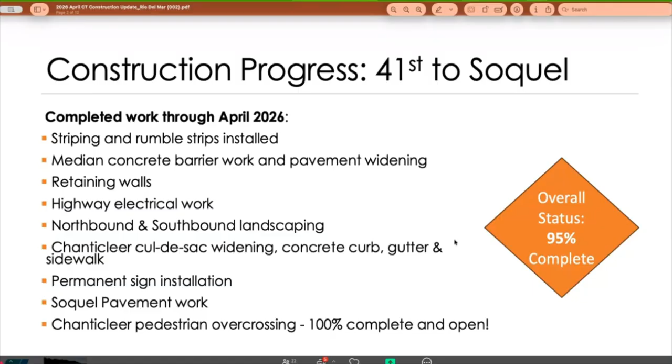They had to put an additional guardrail in there to protect one of the columns of the new Chanticleer pedestrian bridge. So that is the remaining work and punch list work. This one is almost ready to be closed very soon. We can go into the next one.

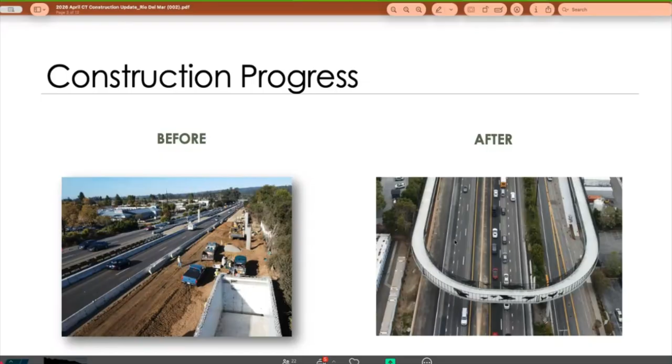So this is just showing how it used to be before, right before the Chanticleer bridge was built. You can see right now the difference. This is also an overview of the change.

It's demonstrating the red colors, where the bus-on-shoulder facilities will be used, which is the highlight of this project, something that has never been used anywhere else. This is a pilot program being implemented in the county. RTC was very active in pursuing and following this type of system that we're going to be implementing and seeing how it works, and then eventually, if it makes sense, expanding it for all the communities in the future.

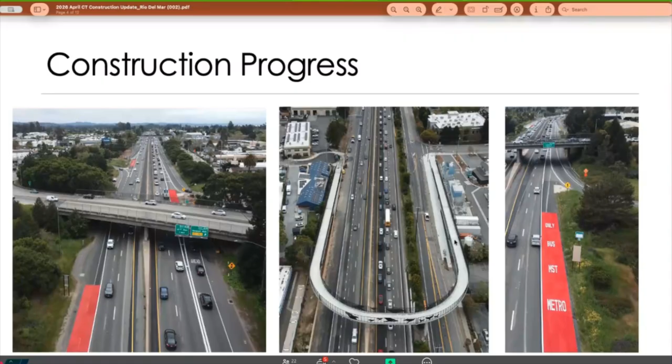Remaining construction is just final punch list and change order work, so it's almost there. They're showing summer 2026, so you won't see much work. I think a lot of the barrier and temporary striping at the Soquel on-ramp will be removed this week, so you'll gain that auxiliary lane back again.

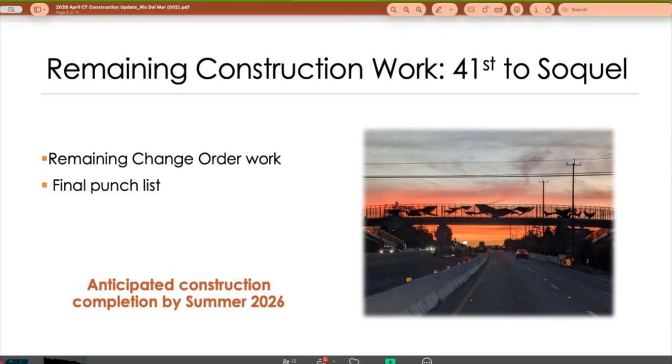Gonna sneak out on you. Yeah, thank you, thank you Rebecca. Bye, bye, see you at the next one.

Okay, now we're moving into this phase 2 project, which is mine. This is from Bay Avenue, Porter Street to State Park. Progress today includes completion of the foundations and falsework for the Mar Vista pedestrian overcrossing. You can see the bridge already starting to rise, right? It's pretty visual right now.

New Capitola Bridge overcrossing is 100% completed. We opened it to traffic, so it was a big milestone for the project, and all the residents were really happy to gain it back with the additional safety features we included, which added bicycle lanes in both directions and a sidewalk. So that was a big success.

And substantial completion of concrete median barrier - about 80% of all the median work is done. The only remaining portion is around the Mar Vista POC bridge, because we have the falsework right now, and that doesn't allow us to do a lot of that work in the median. So we have to complete the bridge, remove the falsework, and then concentrate on the median.

Completion of retaining walls is pretty much done. There were 2 retaining walls at Bay Avenue and Porter that we were supposed to be building, but that meant closing those ramps for a long duration, impacting residents and businesses in the area. So Mark Thomas helped us out with redesigning and eliminating those retaining walls so that we shortened the duration of the work needed to incorporate the bus-on-shoulder facilities. So we went from 6 months to probably 4 months or even less. That was a big gain for the project, time-wise and also cost-wise with the deletion.

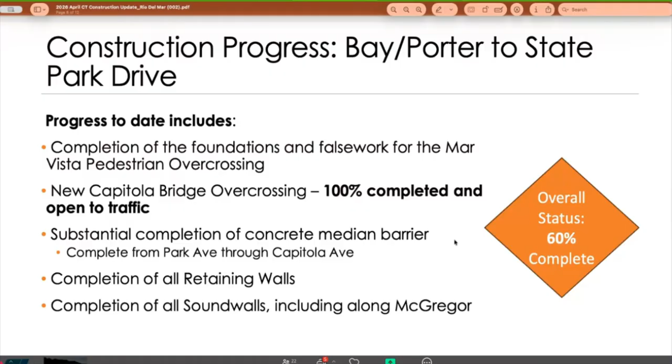This is just showing photos during the construction of the Capitola Bridge, and this is pretty much how it looks now. At this stage we were still working. Once we removed the falsework, we were able to do all the median work, and now we have a solid connection of concrete barriers right now.

That allows us to move traffic toward the median now, so it allows us to do a lot of the widening on the remaining portion of work much sooner. That work was scheduled to start this fall. As we run the construction, we're always trying to see how we can accelerate the schedule and complete the work much sooner, so we're gonna be doing about 80% of what we were supposed to start this fall - we're gonna start it right now. So we'll gain the good weather of summer to complete all that work, and the only remaining portion will be right around the Mar Vista piece.

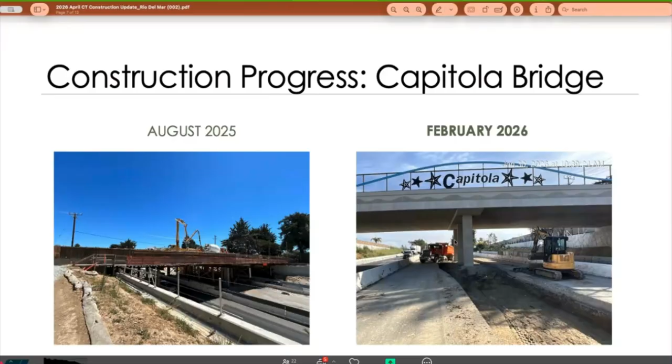Next one, this is just showing the progress of the foundation work, columns, and right now the falsework is up and running. We're starting to do some of the preliminary work, and we had the first frame 3 - frame 3 and 4, so we'll be starting next Monday. It's happening faster, it's really fast.

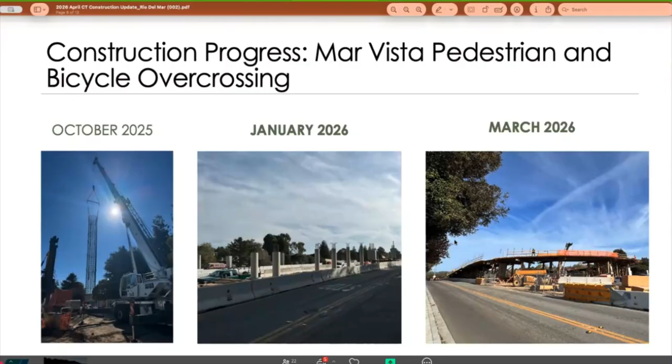No, we don't have any. The problem with that application is that unless you keep reapplying it, it wears out, so then it becomes a problem. During construction we have the availability of doing a lot of stuff, but once it goes into maintenance, they have limited resources, so it becomes a problem for them.

Construction look ahead: major remaining work includes completion of the Mar Vista pedestrian and bicycle overcrossing, widening of the shoulder for the bus-on-shoulder and auxiliary lanes. We're going to gain a lot of ground by advancing the stages, starting right now with all the outside widening for the bus-on-shoulder, including the combination of stages that she mentioned.

Bay/Porter ramp changes will allow us to close those ramps for shorter durations so we can do the work faster and give back to residents and businesses. We always try to stage it so we don't close two ramps at the same time. That's continuous communication with the contractor to minimize impact to the community. It's not just about closing and doing our work - sometimes we spend more money to make sure it benefits the residents. We want to keep residents in mind so they support the project and are happy with the product.

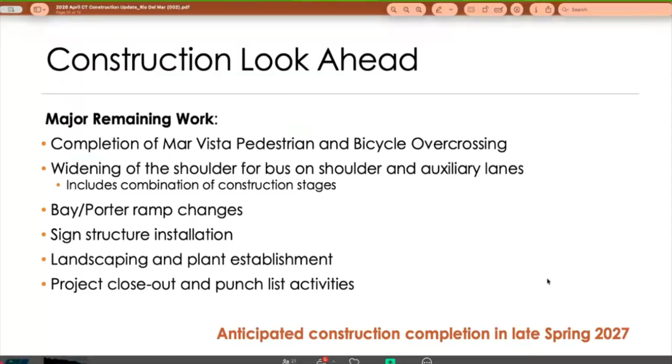Hang on, I had it here. Right there, PG construction. No, go. It's the second one in. That's the one, right? That was the one we just did. We just did that. So do another one? Are we in the right spot? Not in the right spot.

Oh, we have some instructions. Right here, there, that one. There you go. So if you go up to the... where? Beginning? No, sorry, is that what we're shooting for? I'm going right into it. That's wrong. Obviously it's harder than it looks.

We should all sing a quick song, shall we?

Auxiliary lanes, oh, so what's going on here? I got it, here we go. Good, here we go. Stop sharing. Nope, we're good. Where's the... okay, I know, I don't know, nope, it's not stop the sharing. The resolution made everything so tiny here. Where's the?

This, how do you close? There was a red button. Let's just minimize it. There we go, there we go. And then we'll make this... I really, just leave it like this.

I might work with control F. I got this, do it. No, that's what I was commanded. Okay, it is Greg. Well, actually, no, no. Yeah, I can, Greg, there we go. Okay, all right, meet you both. And so now here, and we'll wait. There you go. Okay, all right, we got it.

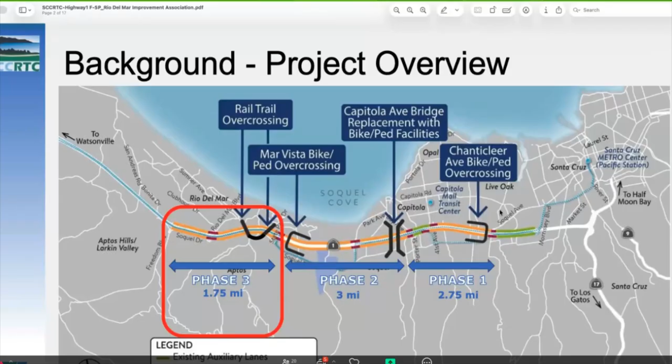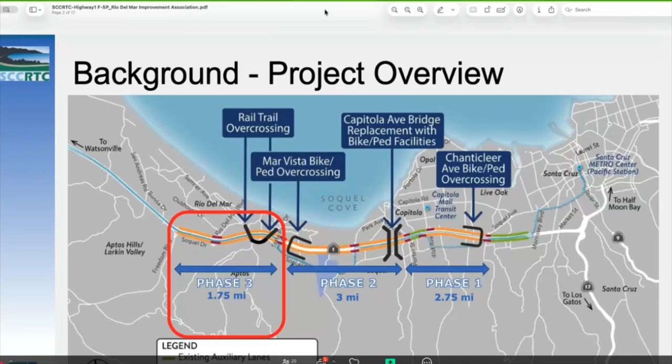If we can go to the next slide - just a quick overview. Phase one, as Fernando was saying, is nearly complete, just wrapping up punch list items. Phase two, the State Park to Bay Porter segment, is 60% complete. And then I'll give an update on phase three, which is about 2 miles from State Park down to Freedom Boulevard. As part of this project, we're also constructing segment 12 of the Coastal Rail Trail.

Next slide. So now, just to confuse everybody, we flipped you around - that other slide was pointing a different direction. So now in this case, north is up, the ocean is down here. Here's State Park Drive, so it's picking up from where the segment 2 project ends, and then it's constructing those auxiliary lanes between the interchanges, like between Soquel and 41st Street, there's a lane that connects the off-ramp to the on-ramp.

And that's again to help with merging on and off the freeway. So it allows for some congestion relief, but the state of California right now is not funding new lanes on the state highway system. So there's a lot to this project.

We're going to be widening the bridge that goes over Spreckels Drive as part of the project. There's some work where we're going to be relocating the roadway for Moosehead Drive, so I've met with a number of folks about the relocation of that road. There's various sound walls that are going to be constructed with this.

And then if we look at segment 12, for anyone curious what that is of this coastal rail trail, it picks up from the end of segment 11, which is right at State Park Drive. It runs along the rail line. There will be a new pedestrian overcrossing over the freeway. It goes down through Aptos Village, crosses over the freeway again, and then comes down and ultimately terminates just on Sumner Avenue, just south of Rio Del Mar. So it's about 1.2 miles of that segment.

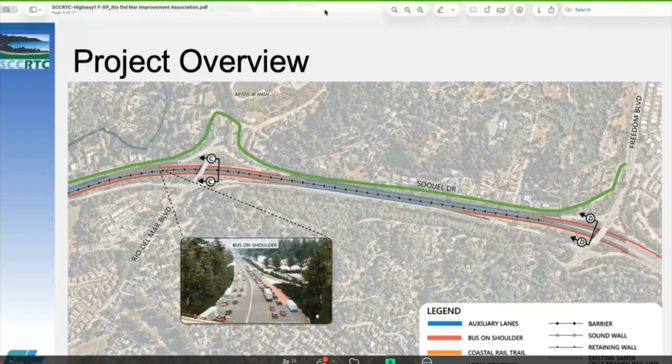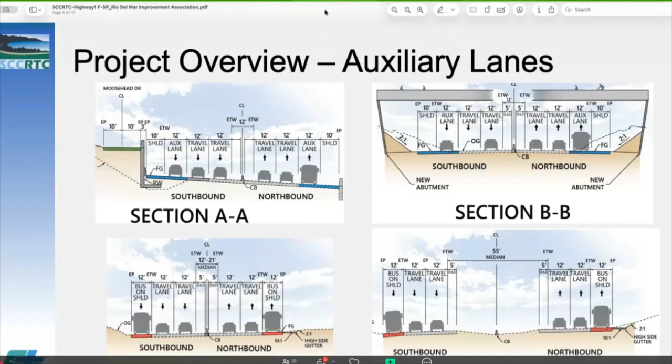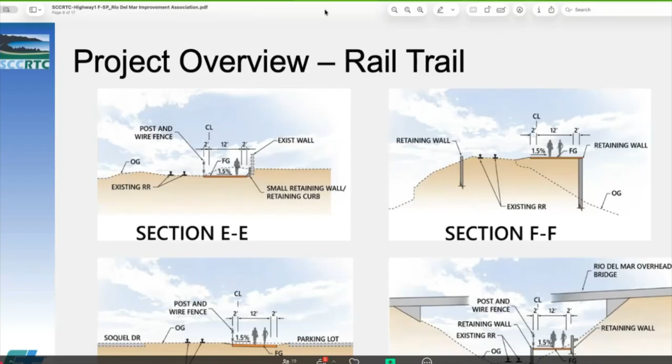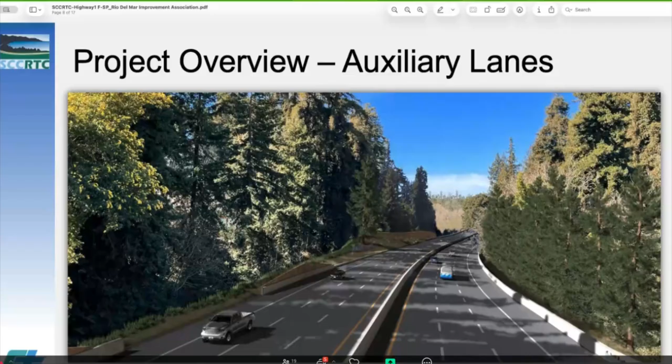Is it turning into an exit-only lane, is what you're saying? Yes, the outside lane now. Exactly. The outside lane will then exit at State Park Drive in that rendering.

Now this is looking northbound from Freedom Boulevard. Again, this is what it looks like today. And here you can see this is where the bus would operate on the shoulder in between the interchanges, and then it'll merge over into the auxiliary lane. Going back, you can see this is the median that's currently out there today. Rather than just putting a new lane on the outside, you can see how we've shifted the whole freeway in to preserve that corridor.

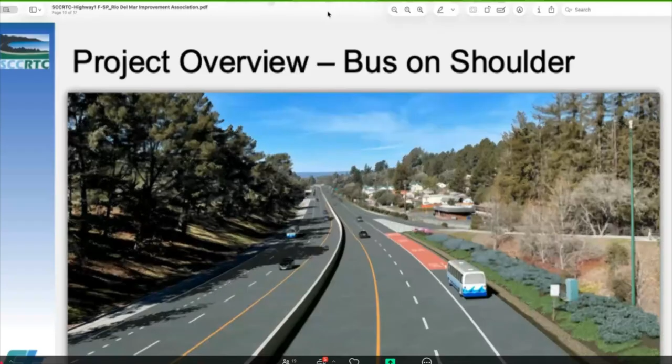This is just a graphical representation of how the bus on shoulder facility works. As Fernando mentioned, this is unique - Santa Cruz County is the only county in the state of California that has legislative approval to do this, so it's being looked at as a test project for the entire state of California. In between the interchanges, the bus would operate in the auxiliary lane, and then continue through the interchange on the shoulder before merging back into the auxiliary lane on the other side of the interchange.

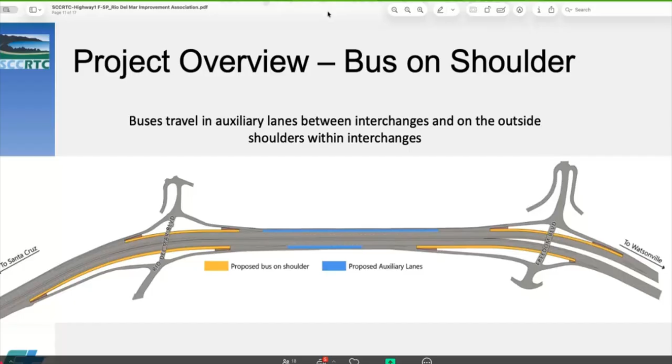So that was the highway improvements.

This now covers segment 12 of the Coastal Rail Trail. There are 5 structures for this 1.12 mile section of trail, with 5 bridges that need to be constructed. It's going to be pretty impressive.

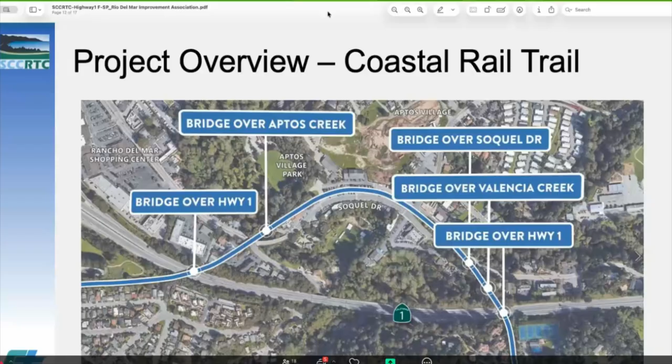If you go to the next slide, this shows some of the art implemented on the bridges that go over the freeway. This was one of the concepts reviewed for this segment of the corridor, and this is a representation of what that art would look like on those bridges.

As we've marched our way through the corridor, every community has had the opportunity to weigh in on the embedded concepts, which were ultimately used in the final design. The Capitola Bridge that we just saw, Capitola residents got to pick. The Chanticleer pedestrian overcrossing with the whales, that community picked. When we did the outreach a couple of years ago, this was the theme community members wanted for these bridges.

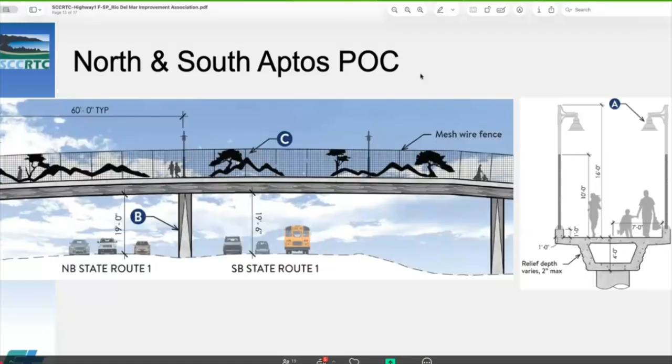Next slide. So this is Soquel Drive right here, and that's Spreckels Drive. There's the rail bridge that crosses over Aptos Creek. Initially we were looking at a bridge with multiple spans.

The problem is there's a high pressure gas line here, and to move it would cost about $8 million. So we started looking at what else we could do instead of spending $8 million to move a gas line, and we came up with a signature structure instead. This is what we're ultimately moving forward with. From this perspective it's hard to see how long it is, but it's 300 feet long - it's going to be a very impressive bridge when constructed.

You're working under the bridge right now - there's a gas line up under that bridge. I think PG&E or somebody's doing maintenance underneath there, not sure what's going on. I drove by and saw that, right here. Yes, we should ask about it. It is PG&E.

Can we have a signature color? So this is the color that was picked - brown, called Golden Gate, using Corten steel. Corten is a rust steel that rusts, like the Golden Gate Bridge. It has a protective coating, and the idea is it helps blend it into the scenery behind it, as opposed to stainless steel or galvanized steel.

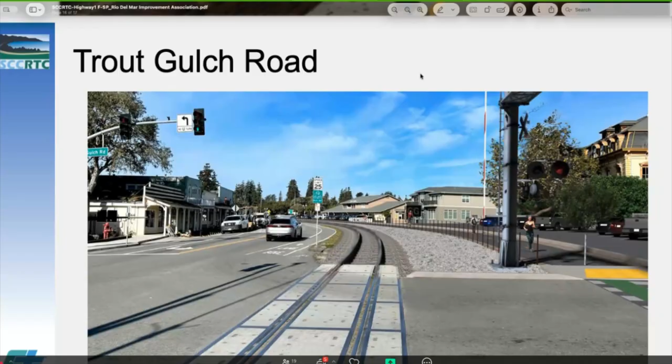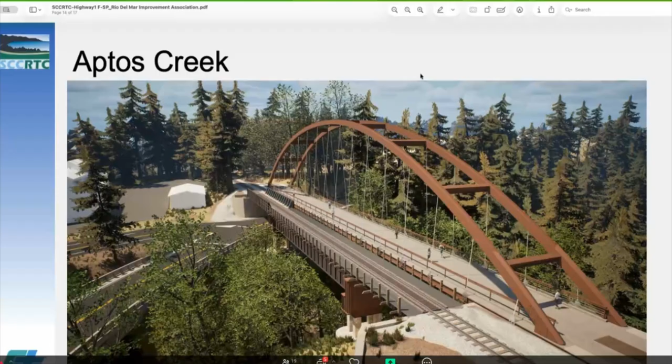Farther down, going in that direction, when you get by the bridge you go over it - that's Spreckels and Soquel. If you go back 2 slides, this is where you are: you come up along the rail line rather than riding along Soquel Drive, crossing over Spreckels above it. This will then continue down over the freeway and ultimately connect with State Park Drive.

Thanks, I think that was my last slide. Good job. Wow.

I live on Aptos Beach right over here. About a month ago, maybe a little less, on a Saturday, they had closed one lane of the road, so all the traffic from everywhere south of me going north went down Aptos Beach Drive, bumper to bumper. People were stopped for 3 or 4 minutes at a time.

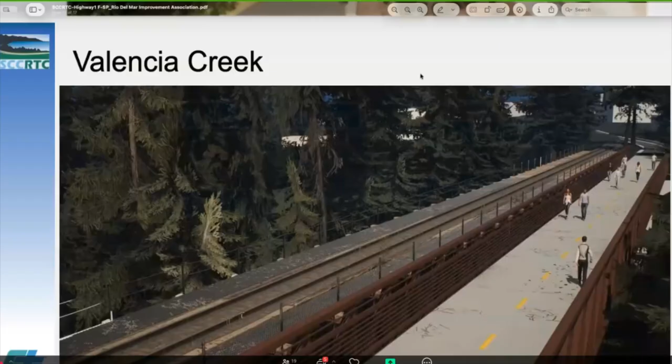Are we gonna experience the same thing with the work on the bridges, all around there? So if you go back to that overview map showing the whole area - this is probably a good one.

Because Soquel Drive just parallels the freeway in this location, when we're planning all of our detour routes for any type of ramp closures, Soquel Drive is the route that'll be identified for that. So if there's a need to close this ramp right here, the State Park southbound on-ramp, the detour will take them up to Soquel Drive and then down through, and then ultimately back on at Rio Del Mar.

A lot of people don't pay attention to that. They come down Rio Del Mar Boulevard, through Aptos Beach Drive, and then back up north. And when one side's shut down, we get off Rio Del Mar. That's been a problem for the last 10 years, every morning. What are you gonna do about that?

Same thing on Sumner. People can't even back out of their driveway. I get so many complaints about that. I feel like we need to have a class action lawsuit against Waze for this - look what they're doing, it's only Waze.

How does that all tie in with the Part 3 project? You have the pedestrian bridge there and that's a dead end with no outlet, and they're talking about building another 500 units and all this. There's no infrastructure for all these cars on Soquel Drive, and it's 2 lanes one way, 2 lanes the other way. In the Aptos Park area, that's 1 lane each. It seems like the state of California is not allowing the widening of the highways, but they're packing everyone in on top of each other with nowhere to go. If you're on Soquel, especially going south, you're sitting there for days - it's like the road's always closed.

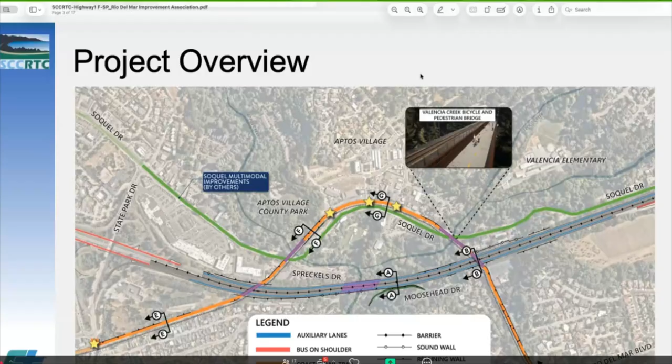It seems to be working north of here pretty well - you don't see the congestion that you used to see every morning, because it is moving, because people are using the auxiliary lane where they can. That's why I asked you, it's an exit-only lane, and people are smart enough to know if they're gonna get off Soquel, they can use the auxiliary lane and go faster and keep going. That allows people who are going past there, in those 2 lanes, to continue. It seemed to work.